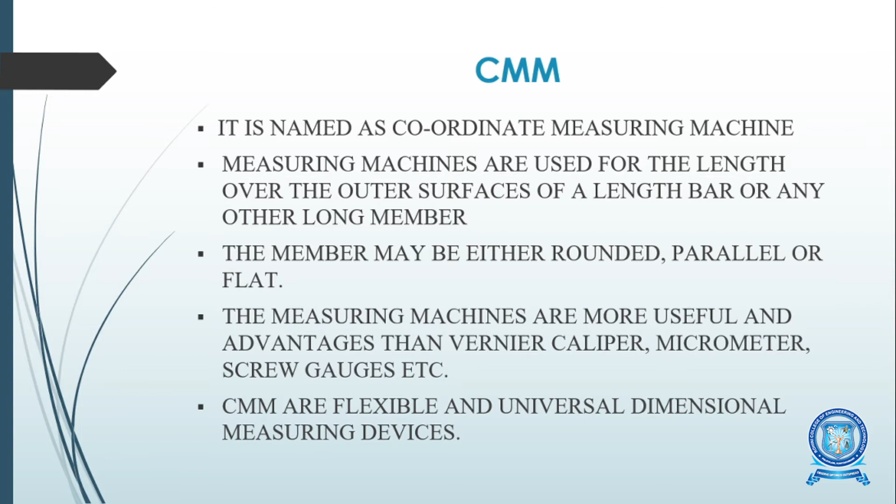Now, the comparison between conventional and coordinate metrology. In conventional metrology, all things are done manually. In conventional metrology, alignment of the test piece is a must, but in coordinate metrology, it is not necessary. Conventional metrology uses single purpose and multi-point measuring instruments, making it hard to adapt to changing measuring tasks. But in coordinate metrology, adaptation of the measuring task is done by the software.

Then, comparison of measurement with material measurement is done in conventional metrology, but in coordinate metrology, comparison of measurement with a mathematical or numerical value is done. In conventional metrology, separate determination of size, form, location, and orientation with different machines is used. But in coordinate metrology, size, form, location, and orientation are determined in one setup using only one reference system.

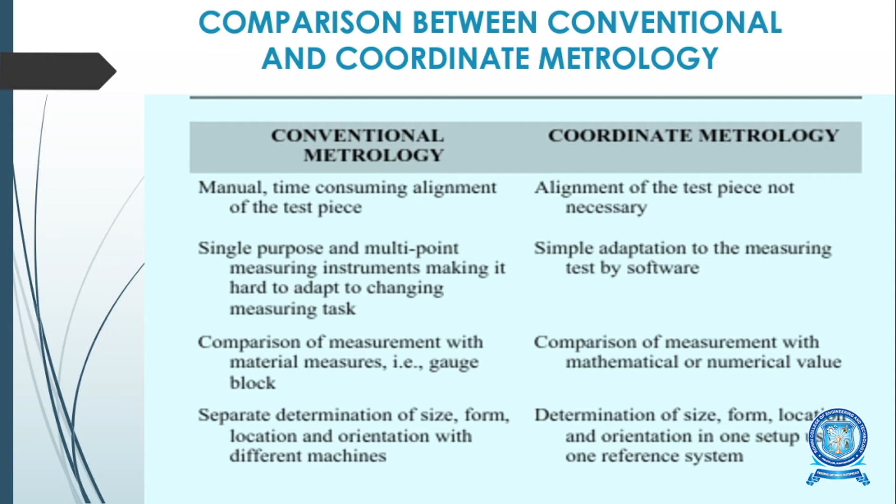The next one is the principle of coordinate measuring technique. The main principle is shown in the given diagram: first is the object, next is measuring, third is data processing, and the final one is the test report. The actual shape of a manufactured part is registered by points based on a coordinate system by measuring individual points on the object surface with a probe system.

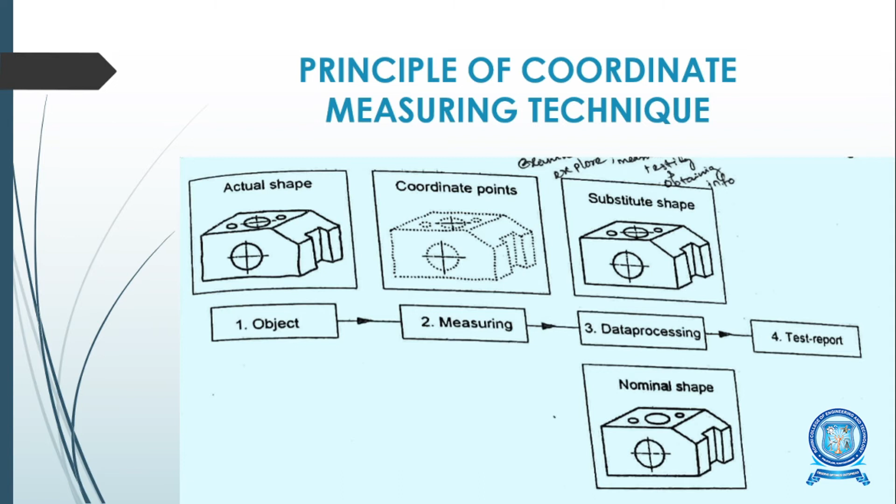The numerical model of the part is a substitute of the actual part shape consisting of basic geometrical elements such as circles, planes, cylinders, etc. The calculation of these geometrical elements is based only on touched points. The area in between the points is not taken into consideration. To calculate geometrical elements, a mathematical minimum number of points is required. To evaluate dimensional accuracy, the substitute shape is compared with the given nominal shape, and the results are documented in a test report.

Next is the basic elements and construction of CMM. What are the basic elements of CMM? Machine structure, linear measurement transducers, probe system, and computer hardware and software. From the diagram, we can see there is a spindle, bridge, linear measurement transducer, probe, control unit, computer hardware and software, and the output printer device.

First is the machine structure, which we call a table and a movable frame. The machine structure is the physical base with three perpendicular axes of travel. This structure has to fulfill the following requirements: minimize unintended movement between machine components, minimize machine deformation through thermal expansion, insensitivity to mechanical vibrations, good damping characteristics, and long time stability.

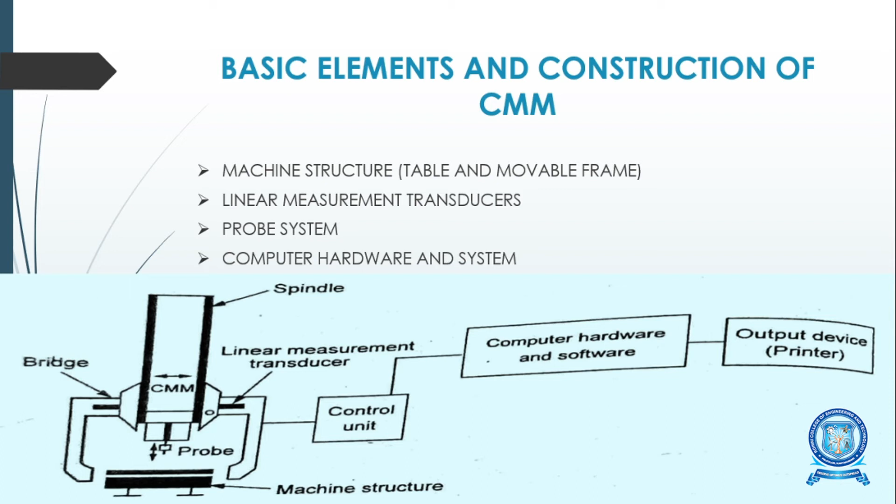Okay, now what are the features of CMM? This is the probe CMM with the computer system. This computer system is connected with the CMM machine and it has a mechanical structure with X, Y, and Z, a three-dimensional axis table. Then there's a bridge to connect the probe. This entire probe setup moves in the Y direction, X direction, and Z direction. And there's a work table to place the particular element.

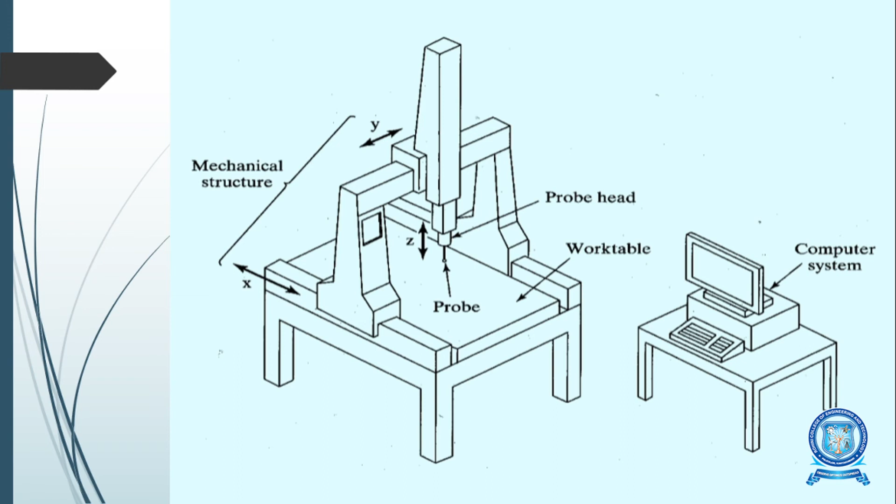Okay, now the types of CMM. The basic CMM has three perpendicular axes, X, Y, and Z. The physical configurations of CMMs vary widely, but they all provide a moving probe in three axes with respect to the workpiece. The different types of CMMs are cantilever type, bridge type, column type, horizontal arm type, and gantry type. In bridge type, there are two different CMMs: movable bridge type and fixed bridge type.

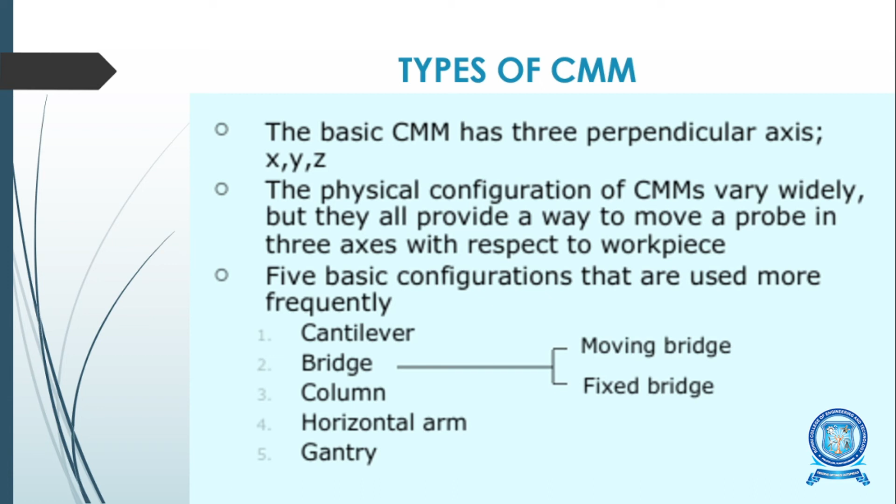The first one is cantilever type. In the cantilever type, the vertical probe moves in the Z axis, the cantilevered arm moves in the Y axis, and the arm also moves laterally through the X axis. The main advantage of the cantilever type CMM is that the fixed table allows good accessibility to the workpiece. One of the main disadvantages is the bending caused by the cantilever design.

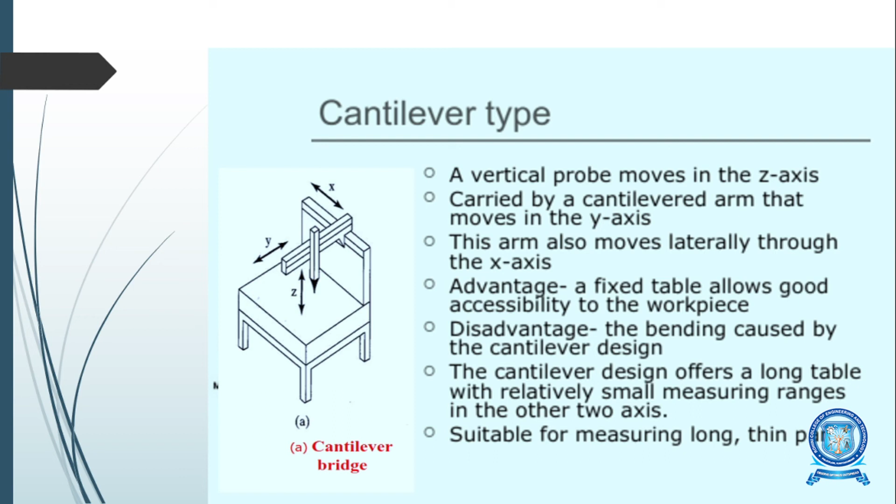The cantilever design offers a long table with relatively small measuring ranges in the other two axes, suitable for measuring long thin parts. This cantilever type CMM is very much suitable to measure long parts or thin parts.

The next one is moving bridge type. In bridge type CMM, there are two different types: one is moving bridge type, another one is fixed bridge type. Now we are going to see the moving bridge type. The most commonly used CMM is the moving bridge type. Here it has a stationary table to support the workpiece to be measured and a moving bridge. The bridge moves over the table.

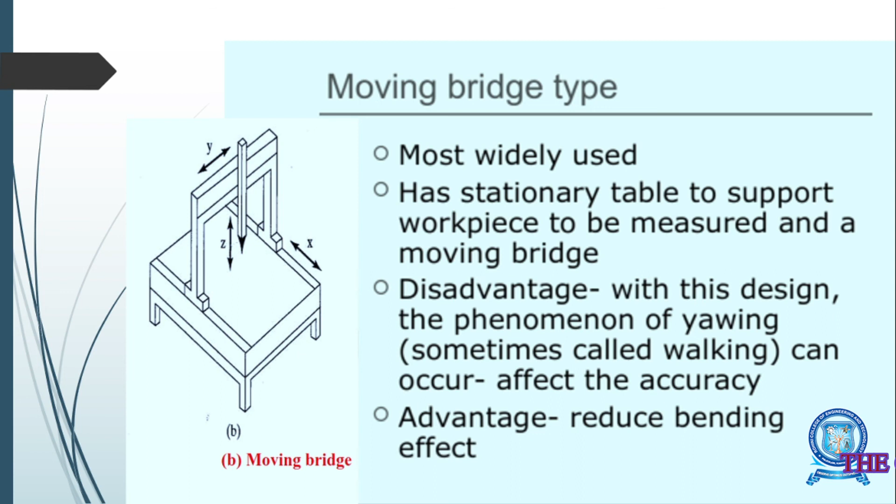The bridge is moving over the table in the x-axis direction, the probe is in the z-axis direction, and the probe head is in the y-axis direction. One of the main disadvantages with this design is that sometimes walking can occur, which affects the accuracy of the output. The main advantage is reduced bending effect. The moving bridge is used to reduce the bending effect of the part.

Next one is fixed bridge type. In the fixed bridge configuration, the bridge is rigidly attached to the machine bed. Here the table moves in the x-axis direction, the probe is in the z-axis direction, and the probe head is in the y-axis direction. The design eliminates the phenomenon of walking and provides high rigidity.

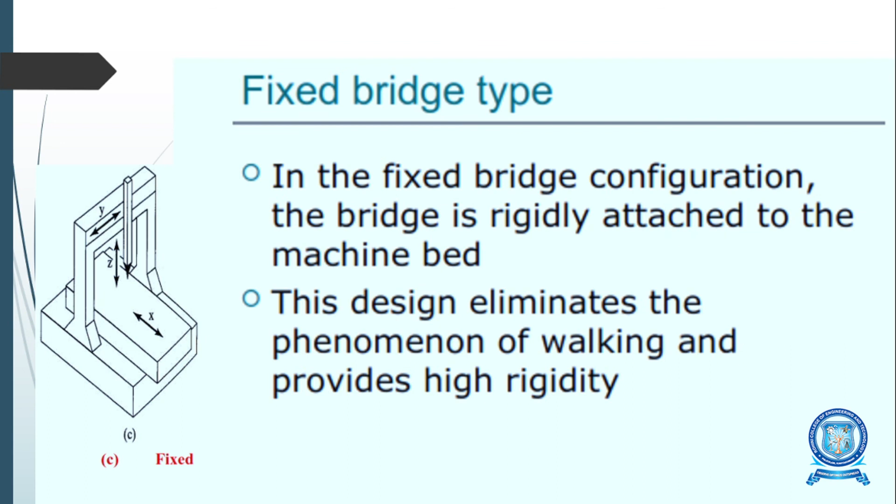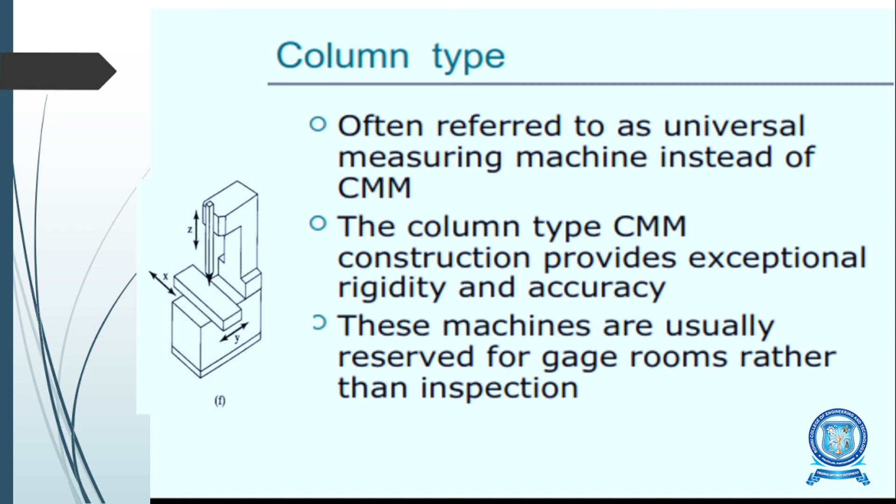Next one is column type. In column type, the bed moves in the x-axis direction and also in the y-axis direction. The probe moves in the z-axis direction. This column type is normally called a universal measuring machine instead of CMM. The column type CMM construction provides exceptional rigidity and accuracy. These machines are usually reserved for gauge rooms rather than inspection.

Next one is horizontal arm type. The basic horizontal arm type CMM is different from the previous machines. It has a moving arm and the probe is carried along the y-axis. The main advantage of this horizontal arm type is that it provides a large, unobstructed work area. It is an ideal configuration for measurement of automobiles.

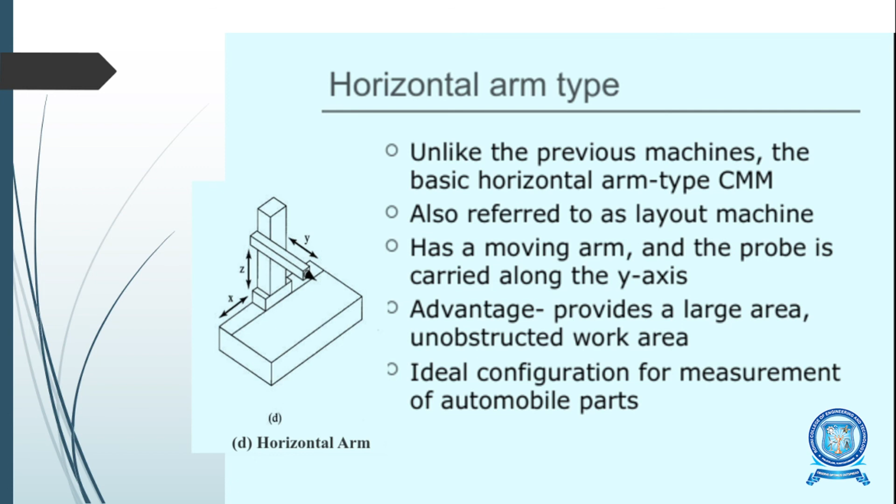Next one is gantry type. The support of the workpiece is independent of the x-axis and the y-axis. Both are overhead, supported by four vertical columns rising from the floor. This setup allows you to walk along the workpiece with the probe, which is helpful for extremely large pieces. So by this, the second part is over.